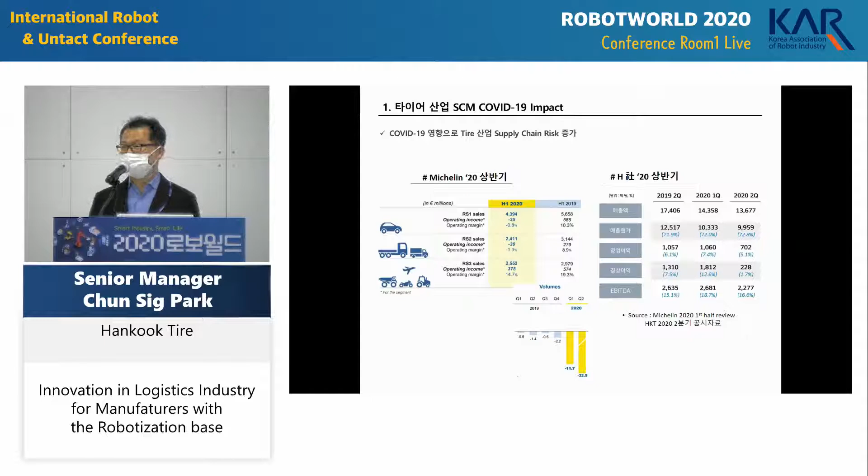A decrease happened in the automobile industry around the globe. This is what Michelin and Korea Hankook Tire shared. The market reduced down to 35%, over 40% of a sales decrease. I'm not bragging, I just want to have something in common with you, and this is what the difficulties we had.

Some reports never mention these difficulties in the past, and we kept thinking of what we should do. Maybe we need some robot that can have some consideration for us. Due to COVID-19, our sales decreased by 30% in April, and in logistics we all had a concern, and this is our conclusion.

There's a fluctuation that became intensified. I didn't place the number on the screen because the number is astonishing. Lack of inventory, because on purpose they had to shut their factory for 4 or 5 days. Some areas suffer from lack of inventory, and there's a term called demurrage detention if you are in the logistics.

US is the biggest market, and once you export the tire, we had a big burden even keeping our tire after shipping to the US, and we are still under big burden to all manufacturing lines, and there's a severe imbalance between supply and demand, and we started to see some issues, and I will talk about it later on.

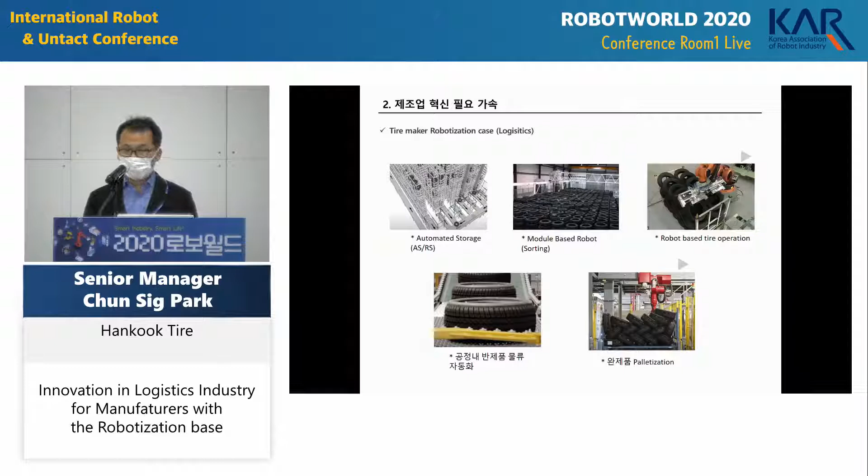Maybe I should skip the video because our screen doesn't have quality. To store some goods, we had some process adopt robotization, and we are concerned. The most effective fields were found: CDC, Central Distribution Center. Just simply imagine a warehouse. RDC, it's called Regional Distribution Center.

You can imagine a warehouse. In a factory, you put a sticker to show the market information and specification of the tires, and about 1% of the entire workforce place the label on the tire. And for this work, robotization really helped.

Second, tire is manufactured from the factory, and one of the most interesting areas for me was this. There are a lot of robot implemented businesses, for example, a company called H. Then, to deploy some new models of tire, then what will happen?

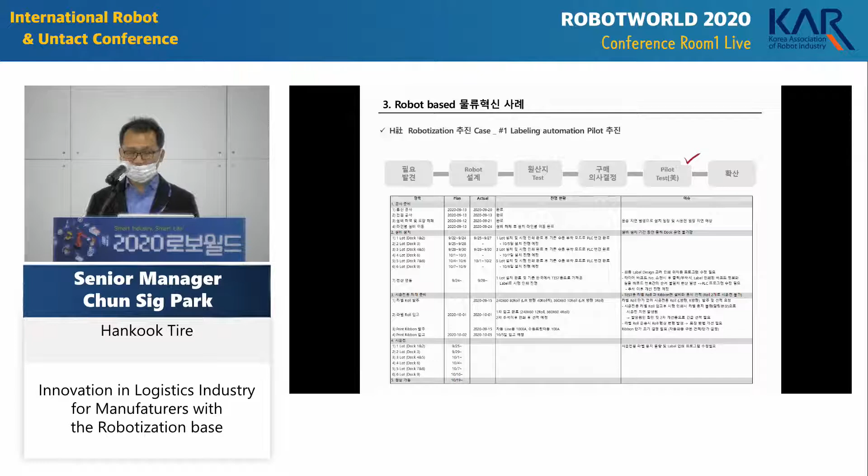Also a contribution to the robot industry. So as mentioned, manufacturing has been inspired by COVID-19. We started to think about what type of contribution we could make to our industry, and we started to draw an ideal model of a robot.

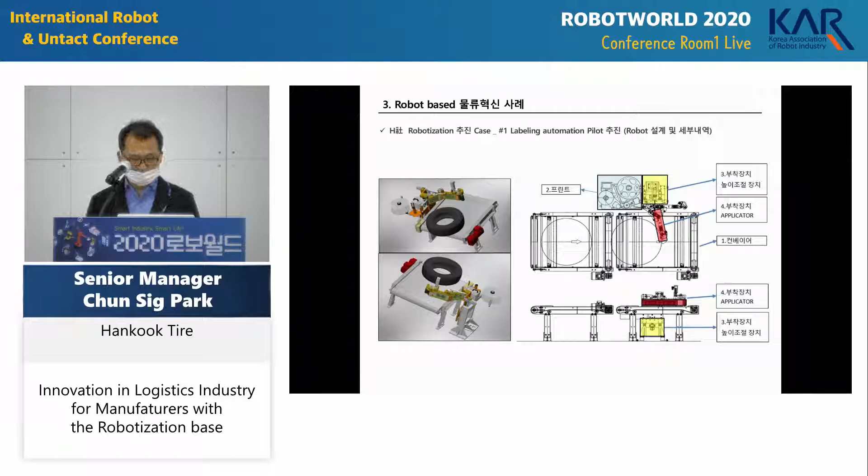Selection, focus, and because we are not robot manufacturers, we just kept contacting partners, and we ended up having a robot - the labeling robot. Of course, the partner has the ability of creating a robot. In collaboration with this partner, we were able to create this robot.

Another goal was there. We have the same products, but depending on the market the products go to, we still have different labels. Let's say you sell this product in America, Asia, or Europe. In the tire industry, the label can indicate the acceleration, the weight, loading, performance. These are the labels, but depending on the country of the market, it all differs.

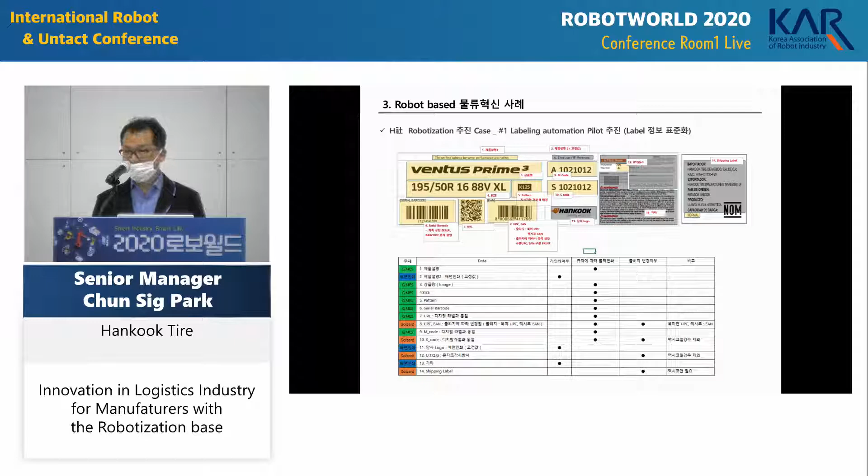So it's not really efficient to have one process doing the same job. In order to use a robot in our process, first of all we had to standardize our robot processes. Say you have people with 1 year of career, 10 years of experience, and they all have different backgrounds, dealing with different products. So we need to standardize the operation. That's how we started this labeling robot.

This was recently established in the US, and that's where we started to have this robot. Let me explain. Each tire in the middle has unique bar information. First you scan the barcode. That will tell you when it was manufactured and confirm the basic information.

Also it helps realize what kind of market this tire will go to, and then you move to the next process. This process used to be done manually. In the US, this is pretty modernized and automated. However, for this specific process, for some reason, it is completely manual.

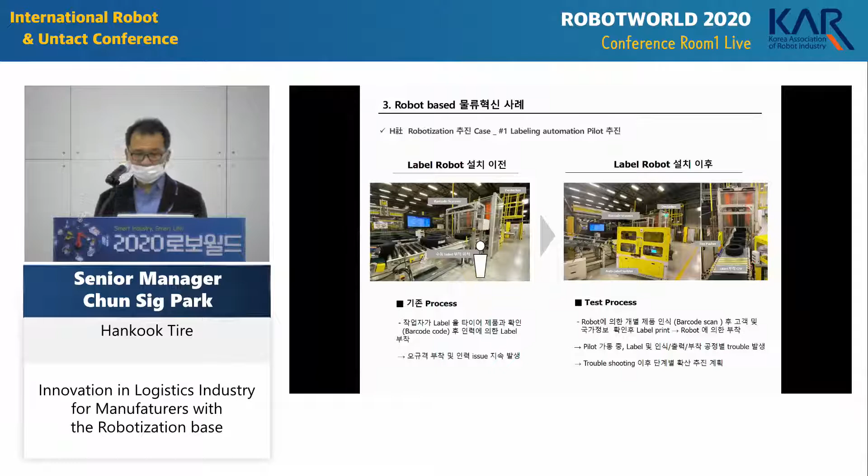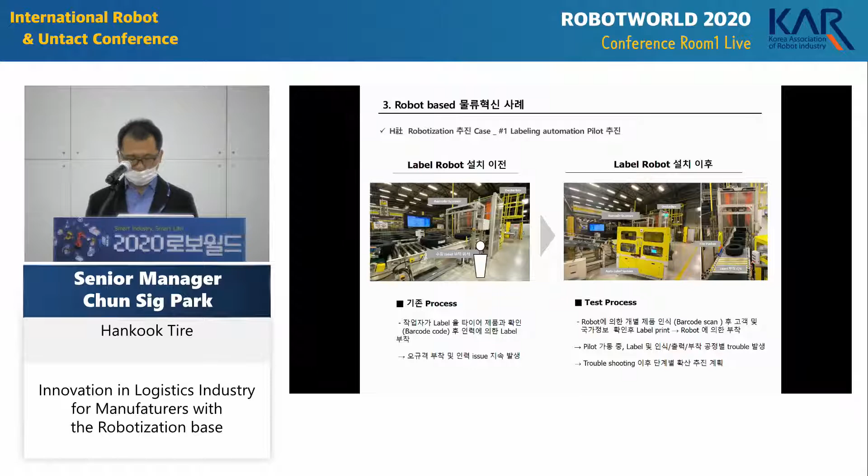This is a picture of before and after installing the labeling robot. I'm sorry about the resolution. After a series of tests, we have some issues which are still being addressed.

Let me show you the video.

Sorry, the video is noisy because he's on site. Sorry, the video is playing. Here you go. Thank you for letting me know.

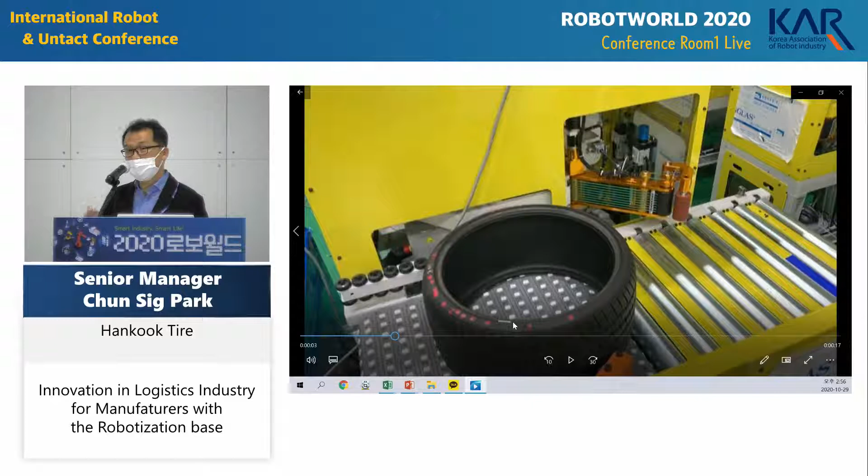So this individual has a little sticker with unique code information, and with that the workers can proceed with their work. Once you read this information wrong, it causes big damage to this factory, and this American company actually went through a lawsuit.

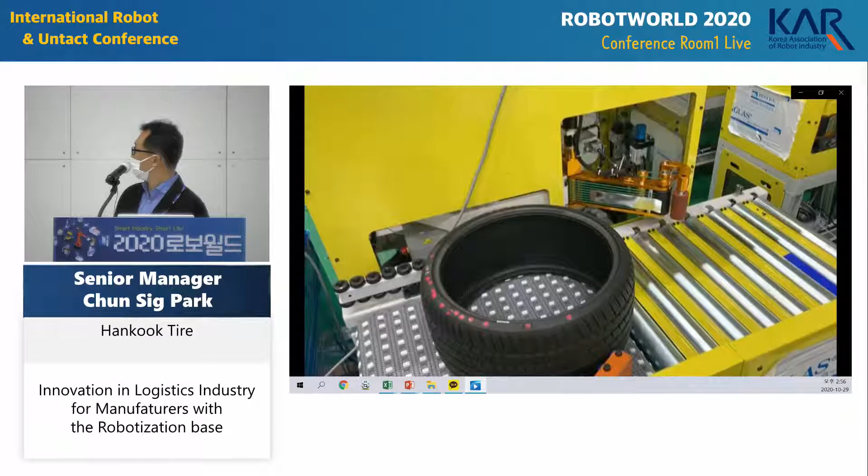There are still some errors recognizing and scanning some boxes, and just to reduce the error rate, we still went through a manual process to check if the robot placed the label neatly or if the right information was there. To be honest, the accuracy is 98%.

This 2% may not seem significant to you, but let's say if you produce 15,000 units of tires, that means 300 could be affected. Then for 1 year, you can have 100,000 tires with defects, and some people inside the industry may use these defective tires. So it's important to move towards 100% accuracy, but it's not easy.

We kept having remote conferences with our partners in the US. You can't see the pictures clearly, but for our troubleshooting, we sent robots to the site. They attach and detach these robots and do some tests.

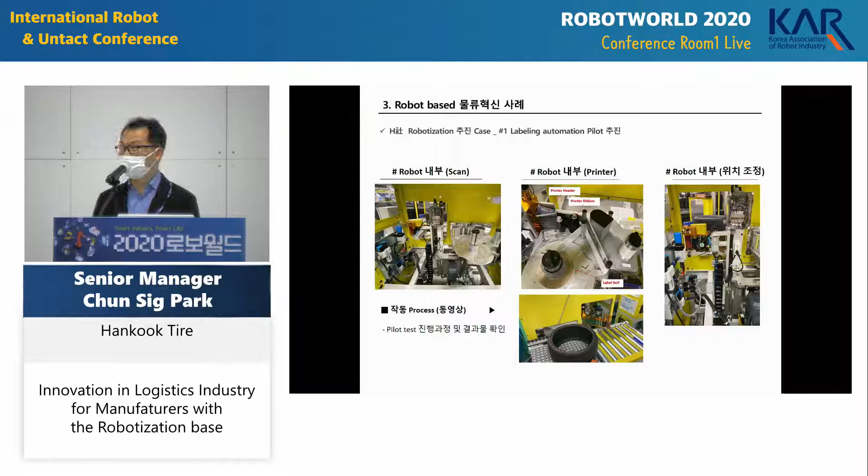I mentioned about 98% accuracy, which is not satisfactory. So we keep updating, and some troubles we found are like the simple attachment of the label inside the tire.

When it used to be done by manual work, it was alright, but robots started to have a crooked movement when placing the label. And I was wondering, why didn't we address this from the beginning?

So this was rather an improvement of the current problem, and we had to find the most effective material for the robot. Still, it has some curvature issues.

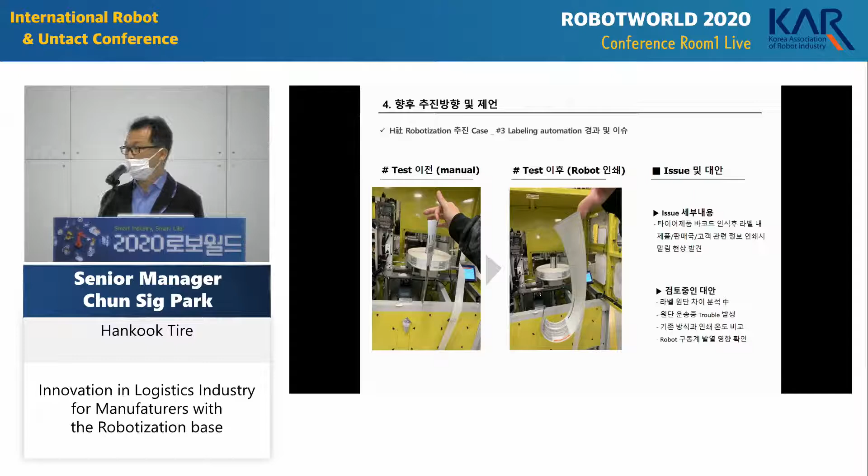Nevertheless, I'm revealing this information to you because I want to share some implications of introducing this robot. So one person used to do this work manually 10 times, and now maybe the robot can do the same job 30 times. In the course of that we still have some issues, and I just want to be honest and share that with you.

And my last page is my lesson learned in the course of implementing the robot. It was not easy.

All I wanted was to solve a little problem on site. But still, I realized I had a first-hand experience of people's concern that robots may replace human work. Once again, introducing robots is not about replacing human jobs. I've been telling people at factories this, but I hadn't enough time and effort to explain it fully. Still, they were not really cooperative to test this robot in domestic factories in Korea. I think this is one of the biggest obstacles you will encounter.

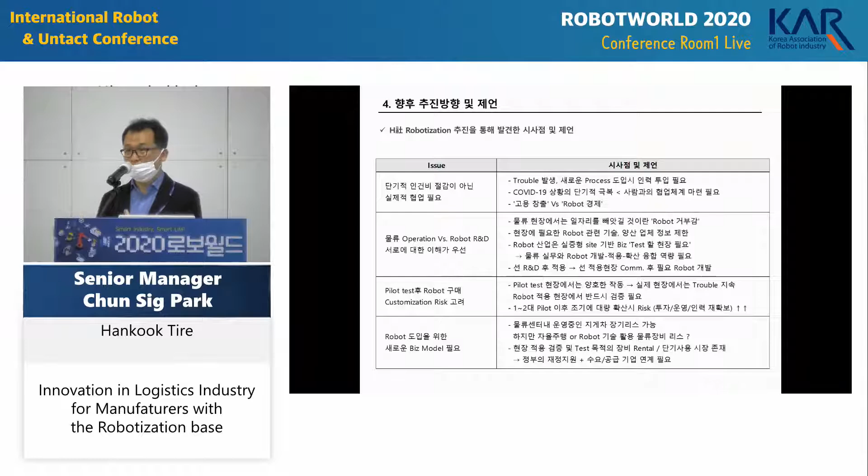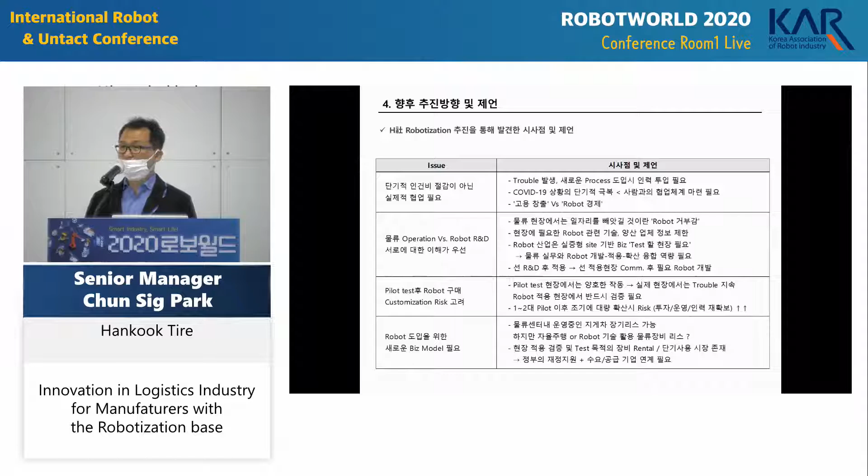We need a new business model to introduce more robots more efficiently. So maybe some robot rental may be a good idea, and some sites are actually favorable for that. AGVs are mainly leased, and maintenance is convenient if you are under lease, but robots are a different story. Maybe we need a good leasing system for robots in the industry.

So far I've been talking about robotization based on innovation in manufacturing logistics, centered around cases and implications, and I've shared some obstacles and concerns. That wraps up my presentation. If you have some questions, now is a good time to ask.

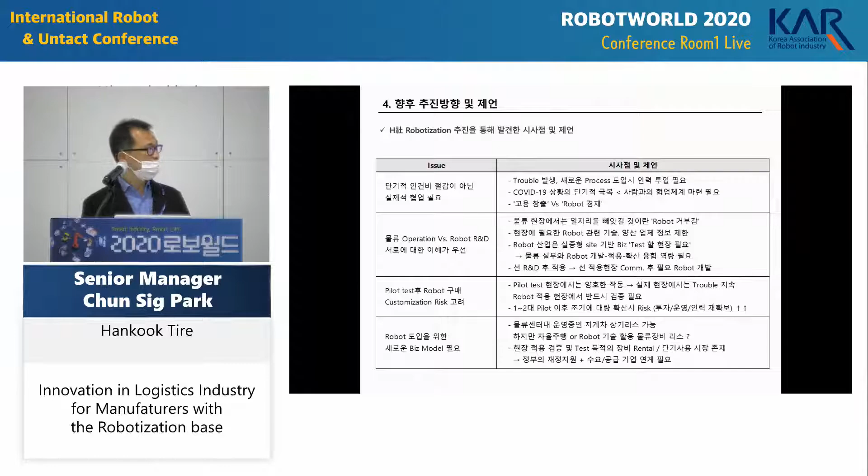If you have a simple question, maybe we can take one or two questions.

Good afternoon, I am from a company called Hansol, and I'm in logistics. I also deal with weights. You mentioned heavy loading, and I totally agree that we need more robots dealing with heavier loading. You talked about one successful case and three failures—well, not yet successful, but something ongoing that looks promising. Do you have some cases overseas? And is that why you implemented that case, or did you just want to be the leader? You also mentioned something I want to talk to you privately about later, but I just want to open discussion now.

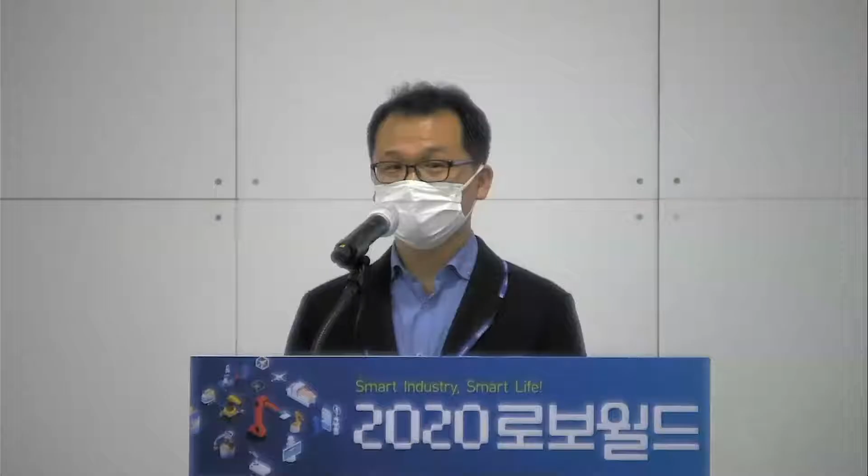Thank you for your question. Let me briefly answer that. We're not the first company—yes, there was a case internationally. After observing that case, we gained some insight, checked their facility, and went through customization. So it was more customization based on the insight we observed. The first one is ongoing, and the three cases are not really failures, but we are still looking for the solution. I was hoping to find some good ideas from you, so I want to give you my business card.

Okay, let me add a follow-up question. I guess even if you did the labeling by manual work, I was wondering why it's still an issue of curving, because printing is the same whether you do it manually or automatically. Thank you for your question.

So the labeling job was done by people, and those workers used to have some warm storage to keep the label warm before attaching it. But with the automatic labeling facility, the US has similar temperature and weather conditions as Korea, so the temperature inside the factory gets chilly, and we had to deal with that temperature issue. Thank you for your question.

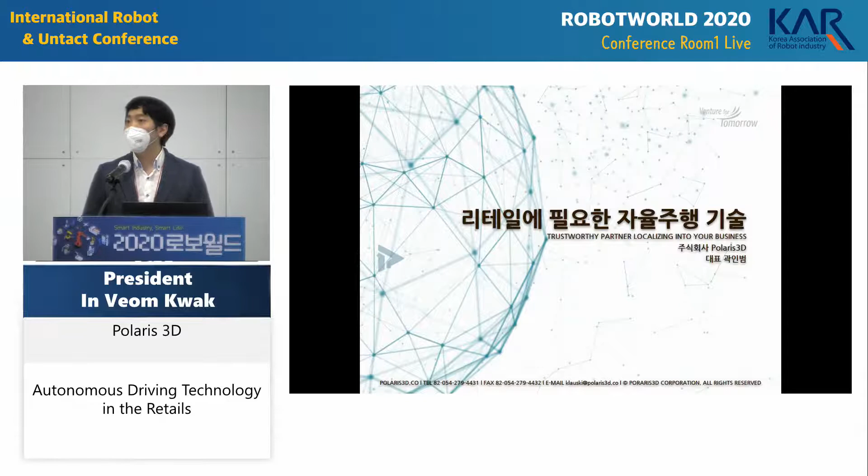To further explain, we developed autonomous driving technologies and solutions, and retail was the first area of application because it is one of the most difficult areas to embrace autonomous driving technologies. So stability and performance of the solution is being tested in the retail field, and if it goes successful, we can use this technology in any industry.

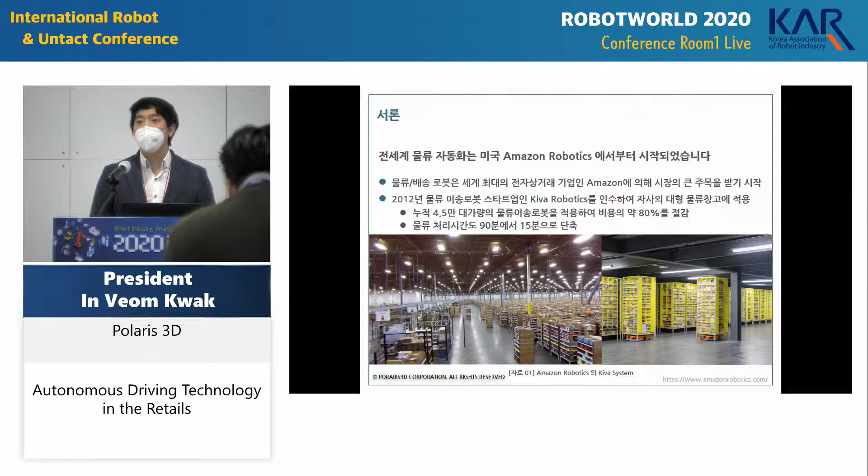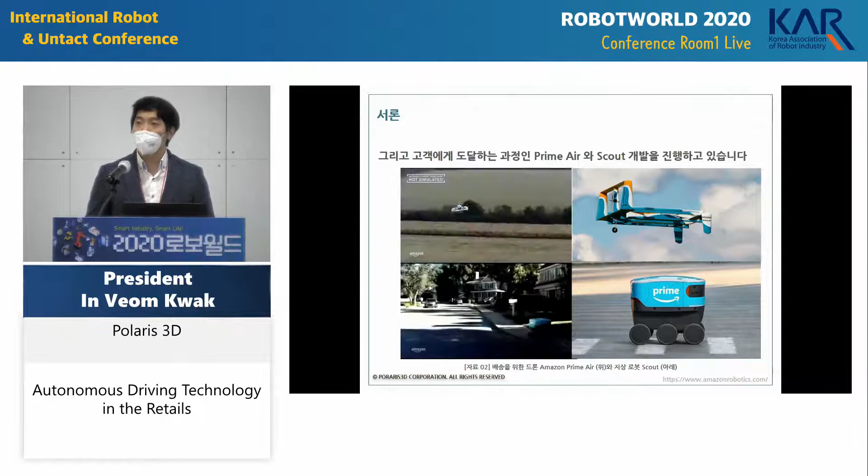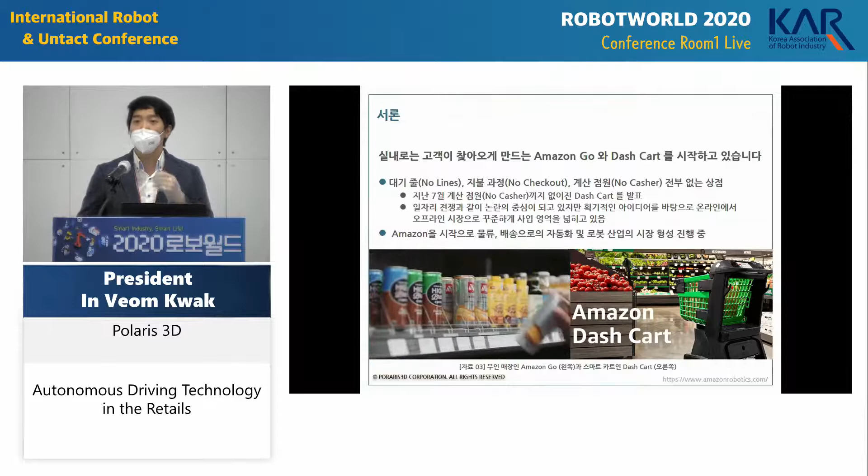To explain the background further, Amazon Robotics Kiva was the first autonomous driving robot. These robots are used at warehouses and move autonomously. Finally, Amazon Prime Air and Scout service launched to deliver products to each customer automatically. Amazon Dash Cart has been implemented to automate the shops even further. This is the big picture drawn by Amazon.

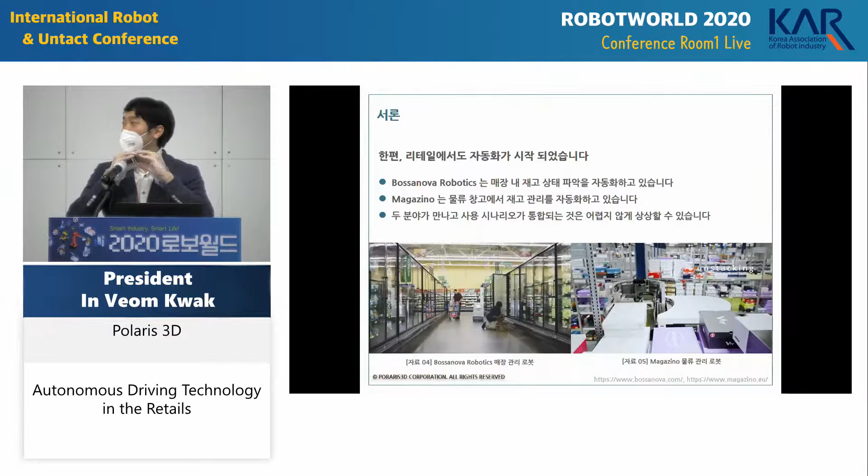Amazon is a warehouse company, but in case of retail companies like Walmart, which has actual physical brick and mortar stores, they are testing with their own locations. For example, Bossanova Robotics now automates in-store inventory status, and Magazino automates inventory management in warehouses. So after all, the automation of warehouses and automation of retail are two sides of the same coin.

So we thought that maybe we can start from retail so that we can automate the entire retail industry, including warehouses. My company thinks that there are 4 automation problems in reality.

Because autonomous driving is one core task for my company, instead of developing the technology industry by industry, we thought that maybe we can categorize the entire industry into 4 categories so that we can have a better idea of developing our technology.

First, the basic driving functions, and second, assistance functions for cooperative work. Third, which is quite critical, safety. Machines should be safe and need to adapt to each situation, but cost and circumstances can change how much safety is required.

And the final 4th stage is collaboration, for the same objectives. For example, let's say that we have self-driving robots moving around within an indoor space, and self-driving capability can be combined with indoor driving so that the whole process can be automated.

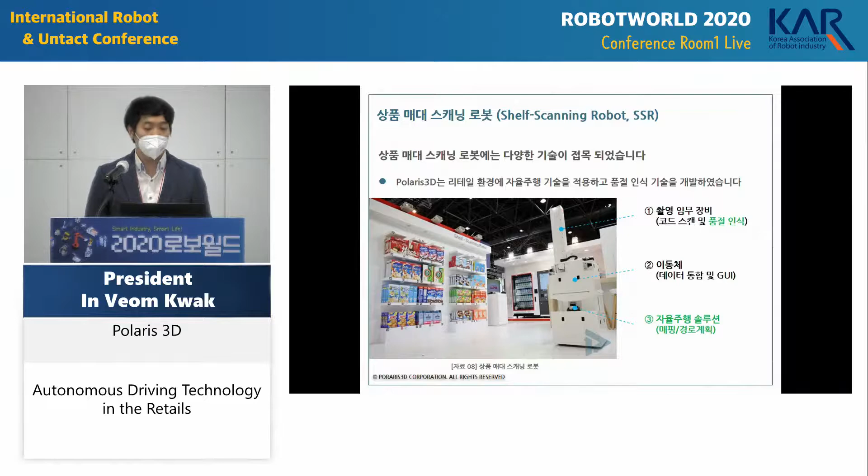The green marked areas were the technologies developed by my company. Let me get into more details.

Autonomous driving robots, of course, if you experience the overseas product, it's quite expensive, and you might think why it should be that expensive. Like the previous speaker, Mr. Park, said, an autonomous driving vehicle which can endure heavy loads does not exist.

Actually, there are many companies who can produce such products because the technology itself has matured. However, autonomous driving plus heavy loading is difficult. So you can separate this problem into 2 parts: self-driving, and heavy loading and unloading. And if you can reduce the cost required for self-driving, you can also optimize the cost for each application, we presumed.

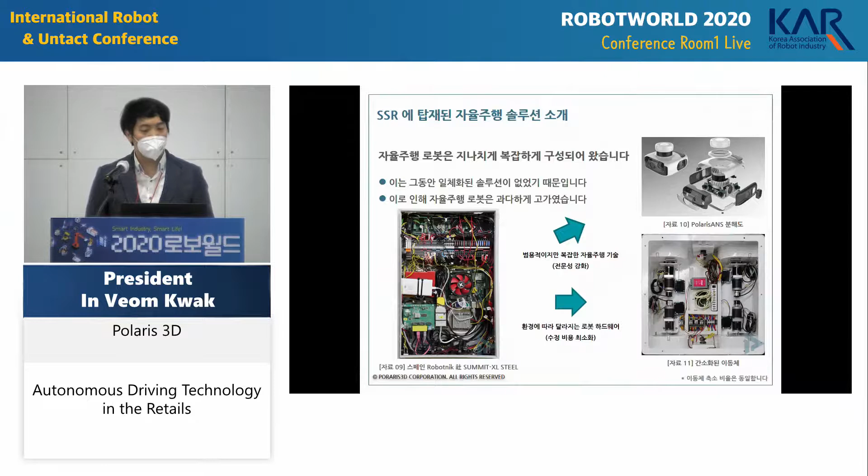In case of our solution, on the top right side, it is called Polaris ANS. This is a self-driving system. We developed this ANS solution and have applied it to multiple devices to produce the same outcome.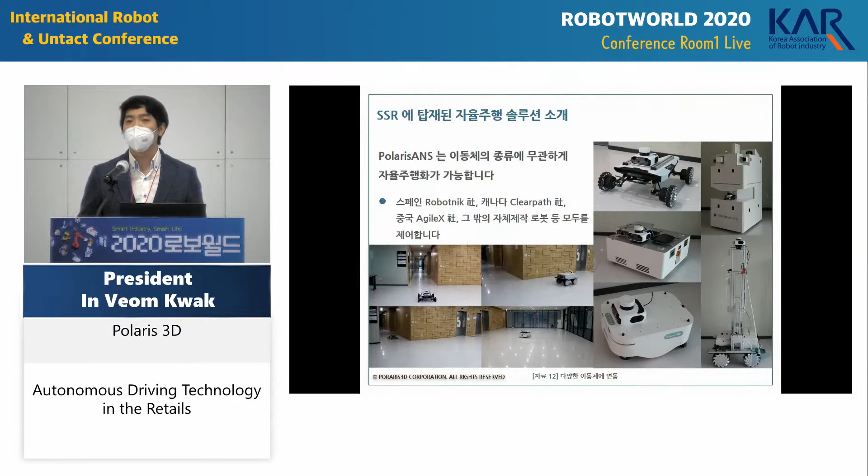Depending on the perfection of the moving body, the performance varies, of course. So we worked with ClearPath, Robotnik, and AgileX, and applied this technology to many open platforms, and the number of applications has increased very rapidly. And if we apply this technology to heavy load lifters, that would be...